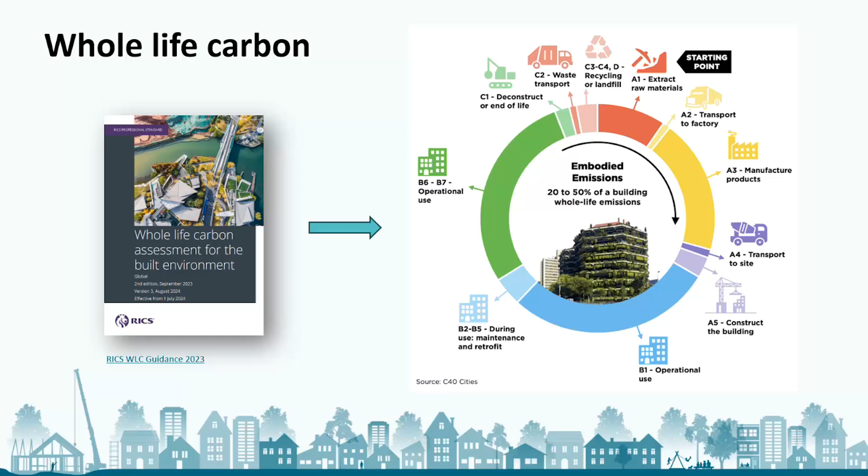Next slide, please. I think one of the problems in this world is the terminology. Sadly, it's full of jargon. And even the professionals like myself and Mansi get caught up in it sometimes. But this is, I think, a handy little guide. This incorporates some of those ABC modules that you saw on the previous slide, but kind of defines the terminology a little bit.

And you'll loosely hear people refer to upfront carbon, embodied carbon, life cycle assessment, whole life carbon. And sometimes they're used interchangeably and refer to the same thing, but this is a handy little diagram that spells out exactly what terminology is referred to what modules, and this again is found within that RICS guidance that we spoke about. So hopefully a useful aide-memoire to get you up to speed with the lingo.

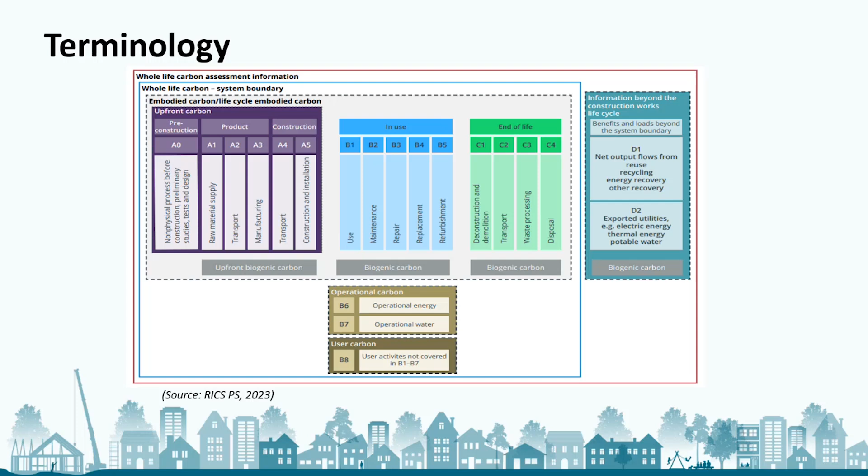Next slide, please. So moving on to operational carbon and the following slide. One of the questions that I'm going to attempt to answer over the next 20 minutes or so is, how can designers balance the operational carbon with embodied carbon, along with all the other design factors that you need to consider when designing housing? So the following 10 slides are my top 10 examples of where you can get the biggest bang for your buck, the most positive outcomes from one design solution.

And I would encourage you all, perhaps if you're in local authorities, to hold developers to account to maybe make sure some of these top 10 design interventions are in designs, and ask developers why they're not. And if you're a developer, then maybe you can challenge your architects around some of these design interventions.

I've tried to put a cost-effective stamp on some of these slides where I think, I'm no cost consultant, but I think there's a relatively biggest bang for your buck in terms of the design solution and how much it might cost. Doesn't mean it will cost nothing, but it means relatively little in comparison to the outcome that it achieves.

And then the icons that I'll show on the right as we go through are what the design feature will impact on. So sometimes you can have a positive impact on all four: embodied carbon, operational, daylight, and thermal comfort. Sometimes just a couple. So I've tried to highlight where they make the biggest difference.

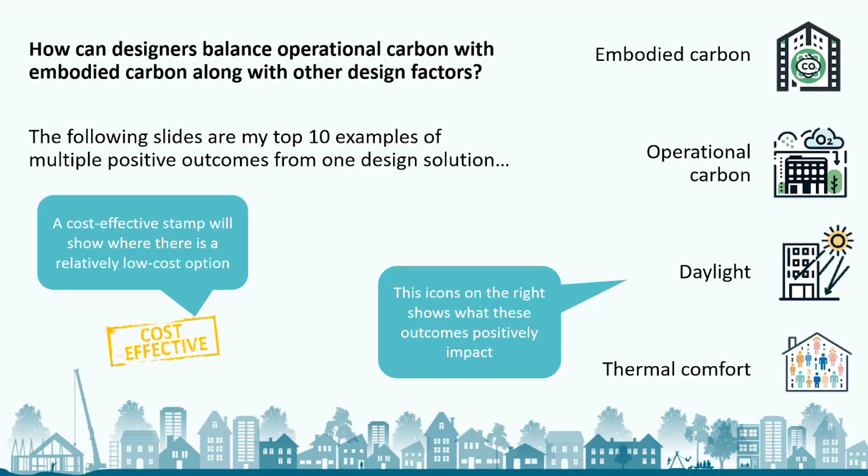But what I should say, I think one of the key things I've learned of late is that good quality homes is the single best thing to aim for. If you can design, build, and have good quality homes in your local authority, they will be loved, they will last for longer, and therefore they have a much greater sustainable outcome. So that kind of takes precedence. I think that's the easy nugget to take away. So next slide, please. Let's dive into the top 10.

So in not necessarily any particular order, number one is airtightness, but with mechanical ventilation with heat recovery. And forgive the image, but if you can encourage developers to make the homes airtight, but introduce MVHR, the two need to work hand in hand. And I think they're relatively cost effective. An MVHR unit and its constituent parts will be £3,000 to £4,000 per home. So relatively low cost, but huge output in terms of operational carbon, it makes a big difference to seal up the homes and reduce your operational energy and carbon.

And it does have an impact on thermal comfort as well, because you get less draftiness through the homes, and probably a fifth impact is well-being. You get much more health conscious homes, if you like, if it's designed well.

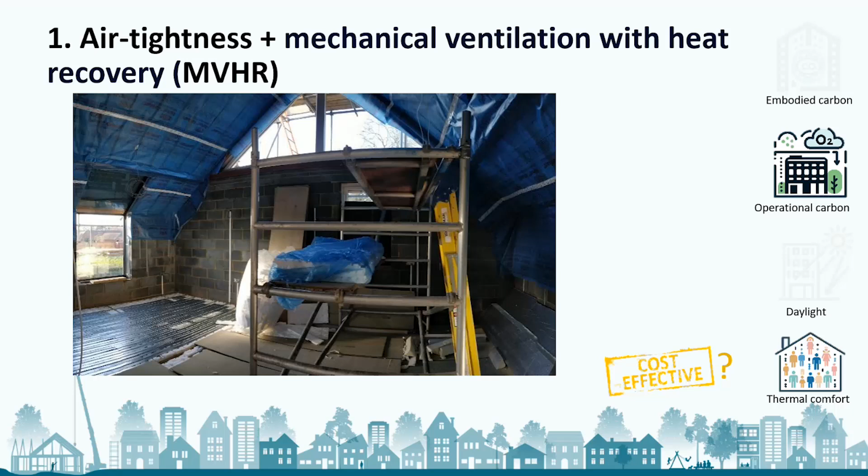Next slide, please. So this is a particular bugbear of mine, and something that's really easy to get right, and something that is cheaper and will impact all four. This probably should be top of the pops. This one is not have floor to ceiling windows. It's a really simple design intervention, putting an upstand into the glazing. Glass has a high embodied carbon content, and wall does not. So less glass, more wall equals good.

Operationally, on the whole, it has a benefit, because glass leaks heat a little bit more than walls do, and homes do tend to be in heat demand for most of the year. There is a slight nuance to this, where on the south facing facades it is sometimes beneficial to have more glass, and you make the most of the winter heat gain. But on the whole, upstands and not having floor to ceiling windows is a good thing.

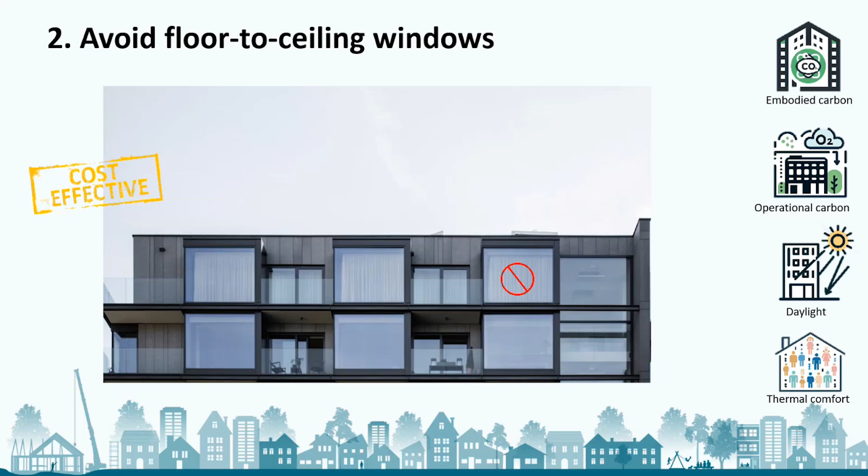Daylight wise, you don't get huge amounts of impact having glass below, say, 800 millimeters. Daylight is not compromised. And from a thermal comfort perspective, you get a lot of cold downdrafts off of big glazed panels, particularly in the winter. So they cause a little thermal comfort asymmetry, and they're not so effective. So hold your architects and developers to account. Don't have full height glazing. Next slide, please.

So insulation specification is another relatively cost-effective impact you can have. If you move towards raw materials, in particular sheep's wool and the like, it can have relatively significant embodied carbon impacts, in terms of good impacts. And for sure, if it's specified right, you can have very big operational carbon impacts.

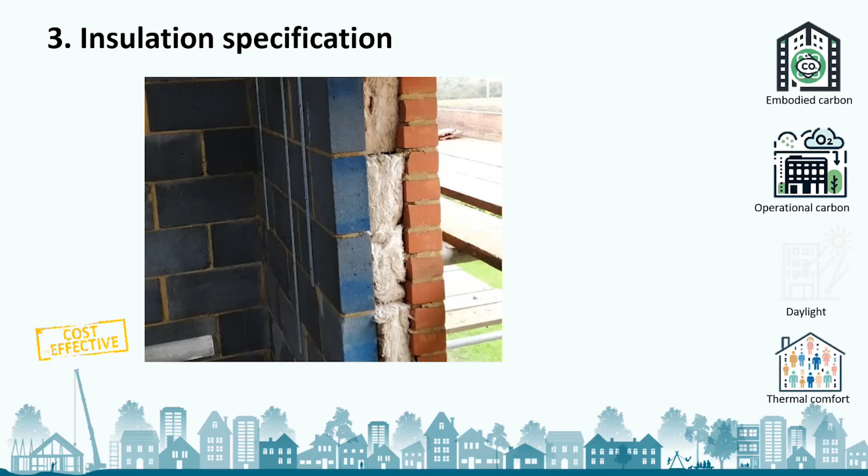The thickness of the insulation also can make a huge difference to operational carbon. Obviously, it doesn't impact daylight so much, but thermal comfort will have a slight benefit for trying to minimize any condensation issues, any cold downdrafts. But the top two tend to be the most impacted ones there. Next slide, please.

So thermal bridging is a tricky one. It's a detail. Devil's in the detail. It's certainly cost effective. It needs to be done right. It's a RIBA stage 4 kind of level of detail that designers need to be considering. And I suppose, to summarize, it's trying to make that yellow bit in the wall, the insulation in the wall, consistent all the way around the building.

And if you imagine it like a big coat wrapping you up in the winter, to keep that consistent layer, and not having any breakages in that layer, like, say, balconies penetrating through it, and even where you have junctions between your wall and the floor, trying to keep that insulation layer consistent.

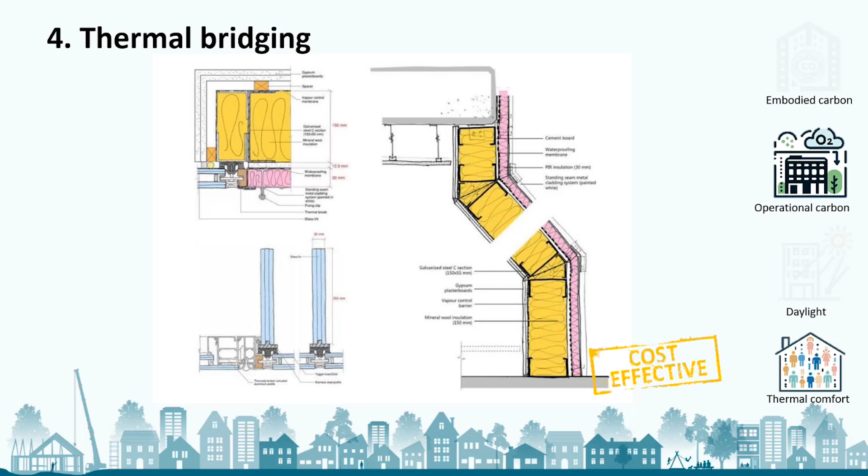It's not so impactful on embodied carbon, and certainly not impactful on daylight, but it will have a huge operational carbon benefit. And again, it will have a thermal comfort benefit, given that you won't have any condensation issues. You'll have less thermal downdrafts and lower thermal asymmetries across the home. So definitely one to question your developers and architects on. Next slide, please.

So where glazing is located and how big that glazing is, this talks to design number 2, that glazing floor to ceiling one, but it's very similar. This is a very cost-effective one. It's something that architects can look at in the early design stages, sort of looking at the window to wall ratios here. And if you have good architects, good consultants, they can do a bit of a parametric type analysis early on to work out where you put your glazing and how big it needs to be.

And there are some nice passive house principles here, where, simply put, if you can encourage more glazing to the south facade, you get more of that beneficial winter solar gain. You obviously need to protect in the summer when it gets a bit too hot with shading. But the principles of more to the south and less to the north are good principles to follow.

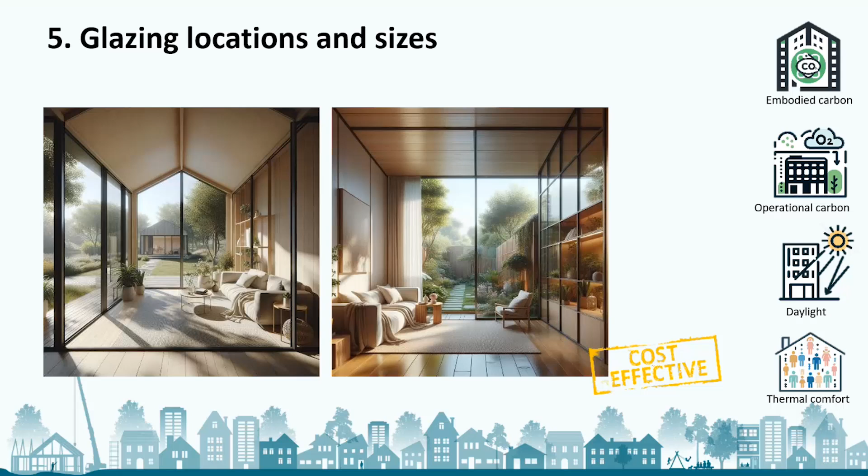Not always practical, I appreciate, on a site when there's maybe other considerations to take into account, but generally speaking, if done right, you can have embodied carbon benefits, operational carbon benefits. It can maximize your daylight and optimize your thermal comfort as well. So good design solution there. Next slide, please.

So net zero carbon definitely is moving away from gas and more towards electric sources of heat. So going fossil fuel free is a big tick in the box. I'm not sure it's cost effective, so the stamp doesn't apply here, but big wins. Maybe one day it will become cost effective, but big wins in terms of embodied carbon and operational carbon for sure.

And strictly it's not a net zero carbon building if you're still on gas or using fossil fuel in any way, shape or form. So a move towards electric heat and electric houses is definitely a good place to go. Next slide, please.

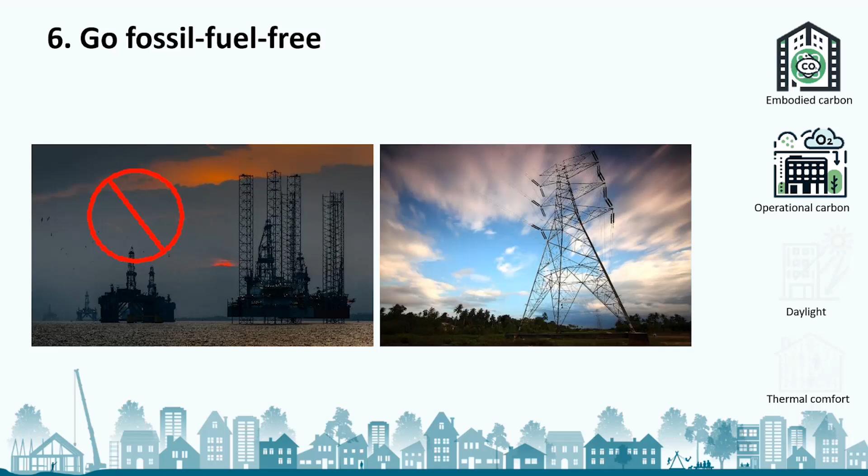Number 7, external shutters. I'm sure many of you have been on the continent on your travels around Europe; you'll probably see these are prevalent there. And as the UK is moving into a warmer climate as a result of climate change, we are seeing warmer summers, and external shutters are a really beneficial design feature generally, and they offer a lot of quality to

a home. They do compromise a little bit on embodied carbon, but if they're done with natural materials like timber, especially for lower-rise housing, it's minimal impact on embodied carbon, and it ticks the quality box that I spoke about earlier. And they give you operational carbon benefits, because it means you can have the right amount of glazing in the right places to get the most from the winter sun, but then close those shutters to protect you from the summer sun.

They do help with daylight, because again, you don't need to worry too much about overheating, and can optimize the glazed ratio for daylight and make your windows a little bit bigger. And then you have a benefit to thermal comfort, because you can get some thermal benefits from those shutters as well, and protection from winds, potentially in the winter time.

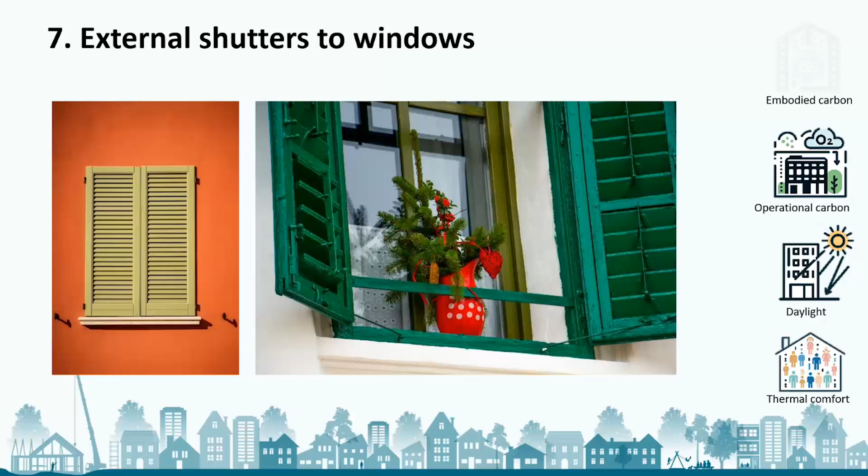So there is and should be a big move towards centralized energy and district heat networks. What this essentially means is taking away the house-by-house approach to heat and moving it into one energy center. That energy center would supply the heat in a relatively low carbon or zero carbon way, and distribute it through heat networks to homes. There's embodied carbon benefits here, because having one plant is better than having loads of little plant across multiple houses. I think it can and should be cost effective for that same reason. You've got one bit of kit instead of multiple bits of kit.

But I guess you've got the infrastructure to deal with as well. Operationally, there should be some carbon savings as well, mainly because you get efficiencies of scale. Having bigger heat sources in your energy center will give you economies of scale and efficiency savings. But also, if you're in an area where you might have different end uses like an office, or even data centers, which we're seeing a lot more of in cities and urban areas giving out heat, and if they can share that heat with homes, then you get huge savings there too. So networking that heat through these energy centers is a real benefit.

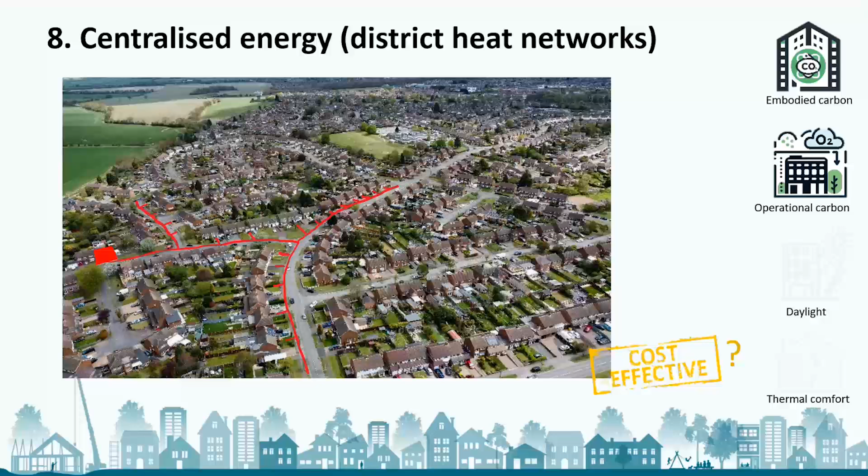So form and massing is very much an early design stage thing. It's something that architects and consultants like myself would help with. It can be really cost effective if done right, and there are some Passive House type tools that can help with this. This is about orientation, the proportions of your building, and where you position it relative to the sun that each building is exposed to. It can have benefits to embodied carbon and operational carbon, and you can get the most out of the daylight and exposure, as well as maximize thermal comfort.

It's a multi-factor thing to consider, and can often be a little bit impractical because you have other challenges that perhaps take a higher priority at the early design stage, such as your road layouts, how the master plan's arranged, safety, public realm usage, and also viewing lines and aesthetics may come into play. So there are many factors, so it can be a little bit tricky, but there are some simple principles that architects can use and be aware of.

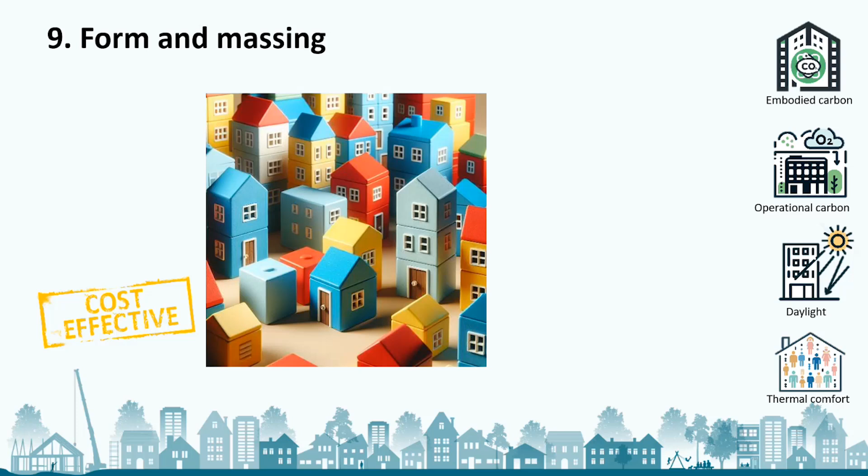Next slide, please. And last but not least, lighting is a really easy win. Certainly cost effective. All developments should be moving towards LED lighting. It's a really easy win. It helps massively with operational carbon. I'm not too sure the embodied carbon savings are significant, but operational carbon savings certainly are.

I've put the thermal comfort checkbox here as well, because some high wattage lighting solutions do kick out heat, and in the summer that's the last thing you want, particularly in evenings when you're turning your lights on and it's still 25 plus degrees outside. So certainly moving towards LED is a really easy win, and everyone should be doing it.

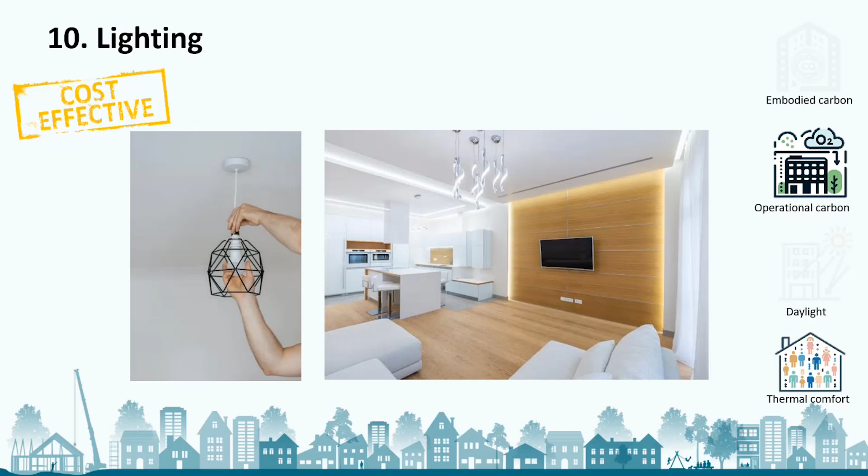Next slide, please. So not only are those 10 design solutions good things to look out for, and I'd encourage you to maybe have a little checkbox for those 10, but there's also these processes to consider during housing design. In-use monitoring can definitely be a useful mechanism and process where developers perhaps report back to the councils, and local authorities can hold developers accountable by having an in-use feedback.

Maybe tricky in terms of data, GDPR, I can never remember the acronym, but data sensitivities about giving up data. But there's certainly methods to help occupants reduce their consumption by having appropriate metering in place, so that occupants can see what's consuming the most electricity, and how they might be able to control their environments and their energy consuming devices a little better. I think there's also a big thing around occupant education and how and when to control various relatively new technologies like heat pumps and mechanical ventilation. So upskilling and educating occupants is important.

And then training for planners and people like yourselves, I suppose, to help encourage good design within developments through the 10 points that I've shared earlier, and through CPD seminars and sessions like this. I think they're really valuable things to help share knowledge and help encourage good design.

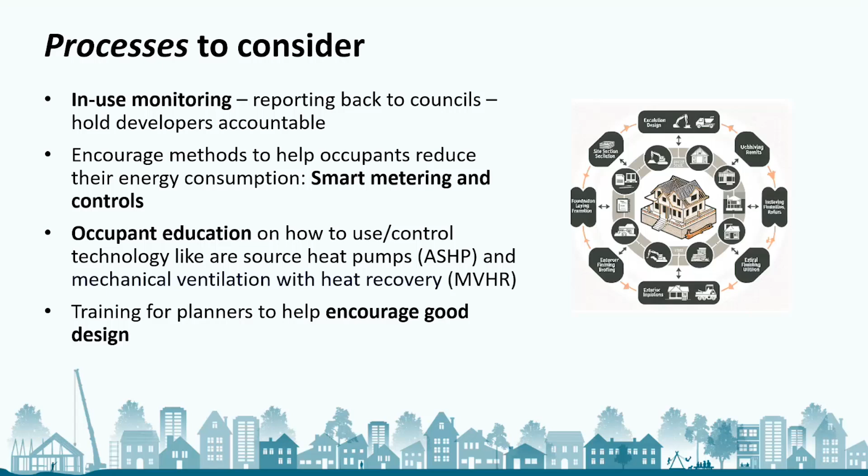Next slide, please. And then finally, delivering and achieving net zero carbon homes, I fully appreciate it doesn't come without its challenges, but there are certainly some opportunities around it. So on the challenge front, certainly cost is often picked up as a key thing, but I think some of those design solutions I've presented earlier can address that. There has in the past been a problem around how we define net zero carbon, and hopefully the new building standard addresses that and gives us all something to point to and say, right, that is good practice and that is progressive and acceptable net zero carbon design.

Knowledge and skills is without a doubt a real challenge in our industry. It's full of jargon. Even myself, and probably no doubt Mancy's learning every single day, and there's loads for lots of people to learn. So sharing knowledge and skills is a huge part of it. And things have changed a lot over the last few years in the sustainability world. It's been a bit of a whirlwind, certainly in the last 3 to 5 years. There is a bit of a challenge around precedent for net zero carbon homes. There's perhaps not many out there, and Mancy will show you some of the case studies later that will hopefully give some inspiration and references for you to point to.

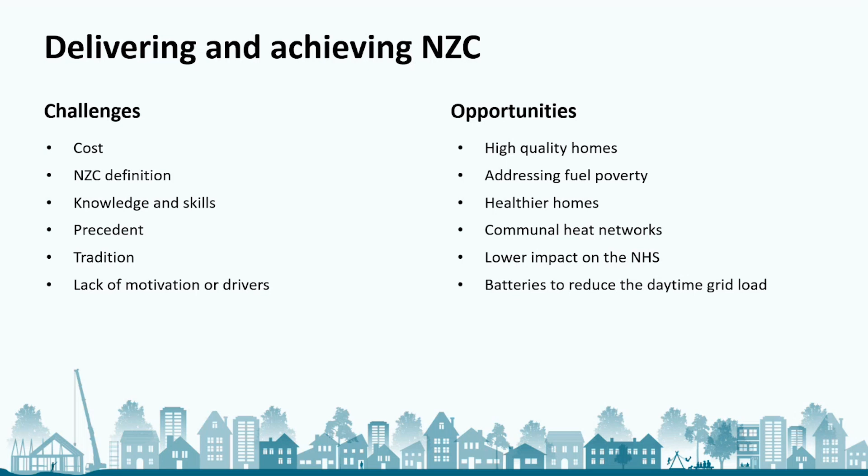I'm Mansi Desai and I'm a technical director and head of sustainability at Pell Frischmann. We are a sustainable design and engineering consultancy. I've been working within sustainability for over 20 years now, delivering low carbon climate resilient schemes for various sectors, including buildings, land development, transport, energy, and water. My team works alongside our multidisciplinary environmental and engineering teams to offer pragmatic designs and advice both to the public and private sectors. And we've been doing a lot of work with Homes England as well.

So picking up from what Ben's shared earlier, when we think of net zero homes, we often focus on energy efficiency. We've spoken a bit about solar panels or insulation, smart appliances. But there's another important factor we can't overlook, which is embodied carbon. Now, embodied carbon is the amount of greenhouse gases which are associated with the construction and life cycle of a building or infrastructure. So while operational carbon, which is heating, electricity, etc., is often addressed in net zero designs, embodied carbon focuses on the hidden emissions within the building's life cycle.

So in the next few slides, I'm going to take you through some of the key considerations to make, what it all actually means, and also share some project examples. Next slide, please. So embodied carbon accounts for a large proportion of emissions in energy efficient homes where operational energy can be minimal. So you may think that your design or development proposal includes solar panels or double glazing or low energy electric supply or all of the wonderful considerations that Ben was talking about earlier, but your overall carbon impact could still be high because of your embodied carbon.

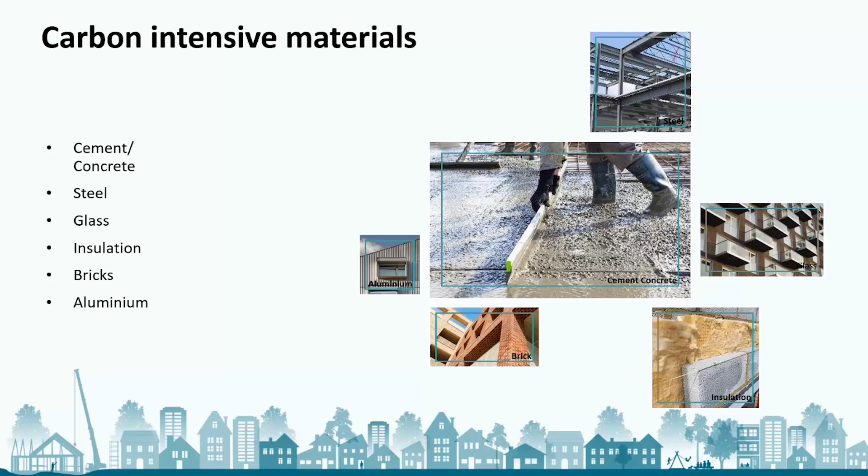Next slide, please. So what accounts for embodied carbon of these materials? Each of the materials that we looked at in the previous slide and any of the other materials that we've spoken about today, or you might know of, which are used within housing developments, all of them go through this process, which includes extraction of virgin materials such as aggregate, metal ores, etc., if they are not from a recycled process, that is. Secondly, manufacturing and the refining of those materials. The transportation of the materials to the construction site, so the greenhouse gas emissions from the vehicles for transportation. The construction and installation, which may require specialized equipment, electricity, water, labor, etc.

And it doesn't stop there. It also includes the disposal of materials. Most of the sites would have some form of existing asset. And so the demolition or dismantling of the existing asset and disposal of those includes a lot of carbon. And once operational and in use, the maintenance, the repair and repurposing of an asset also has embodied carbon. So as you can see from the infographic below, every stage of the life cycle includes embodied carbon, right from extraction to landfill and recycling.

Now, if you look at the use and maintenance of the building, that's where the majority of your operational carbon sits. And this relates to the figure that Ben had shown earlier. So embodied carbon truly is within every stage, and it's a very important point to address when you're wanting to develop a net zero home.

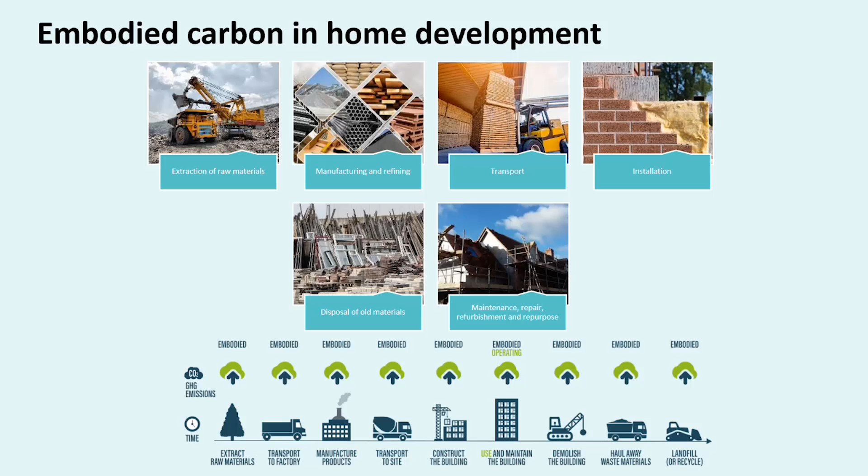Next slide, please. So developing a net zero carbon asset requires driving down the embodied carbon to an absolute minimum. So early involvement is key. The earlier the involvement in the design process, the bigger the potential carbon saving and embedding of sustainable design practices. So as companies are committed to net zero pathways of their own, as governments are committed to net zero pathways, they are now also focusing on reducing the carbon footprint of what they're building. So less embodied carbon can mean a lower requirement for carbon sequestration. This is a vital step in reaching global emission reduction targets.

Whole life carbon approaches ensure that all of the factors that contribute towards the creation, maintenance, and operation of a home, which ranges from material choices, construction methodologies, maintenance, operational energy, water usage, and also planning for cost and funding, are taken into account.

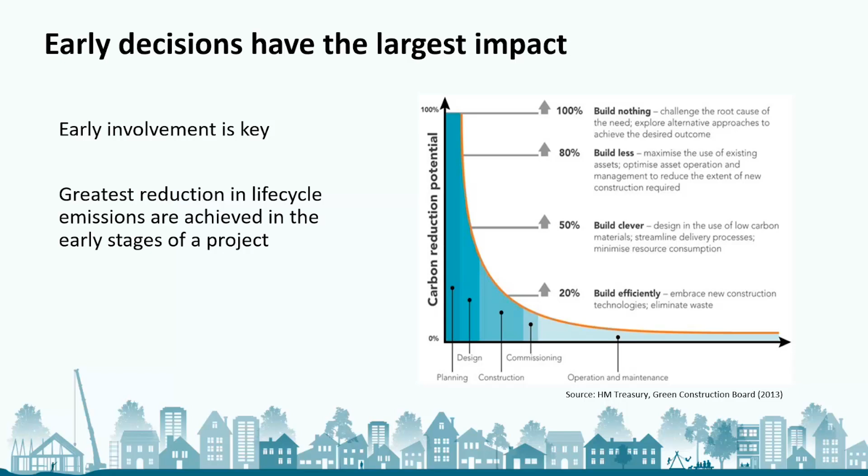Next slide, please. So when it comes to building homes, infrastructure, commercial spaces, the decisions made during the initial design phase have a lasting impact on the structure's carbon footprint. We've seen this on every project that we are involved in. The earlier you get involved, the earlier you start deciding what sort of sustainable practices you want to adopt, the greater the impact from not just a carbon perspective, but also from a cost perspective.

It's easy to think that reducing carbon emissions is something that can be addressed later, perhaps through energy efficient technologies or renewable energy sources. However, by incorporating carbon right from the start, we can make a far more lasting difference. So how do you do this? Number one is setting clear net zero goals right from the start. And whilst doing so, ensuring that the targets are aligned to building standards.

We heard a bit about the building standards, and also local, regional, and national net zero targets and policies and standards. Every local authority has some level of net zero targets. Every organization also has their net zero targets. So making sure that all of those are taken into account. It's not just at an operational level for an organization, but you drive down your targets to an actual project level.

The initial design stages is where the foundational choices can be made, especially with regards to what materials are being used, how the building is designed, how is it going to be constructed, how will it interact with the environment. These are all questions that you should be asking right at the start. For example, choosing prefabricated and modular techniques can help lower the embodied carbon, and also addresses the changing landscape of the industry. We are seeing a shift from building assets that are built for a 50-year lifespan. You need designs that are adaptable.

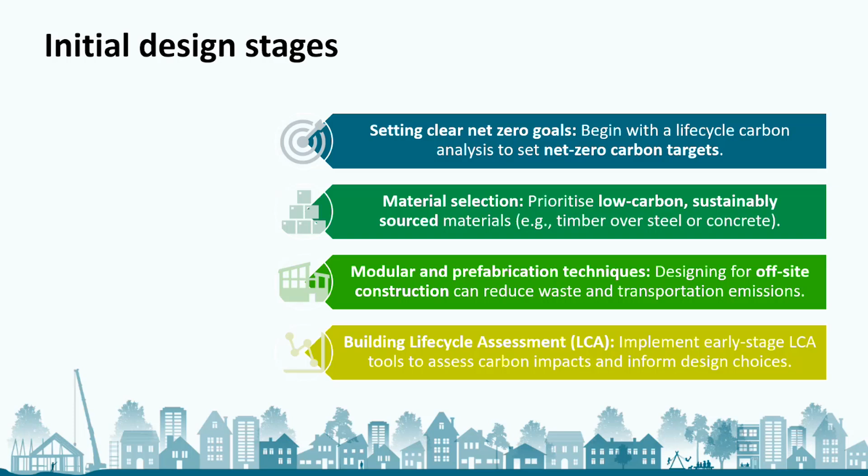And finally, implementing life cycle assessment also allows for the integration of renewable energy systems in ways that can make more sense for the building's specific needs and location. So this proactive approach will allow the designers to create energy systems that are highly efficient, cost effective, and further reducing our reliance on fossil fuels.

Next slide, please. So just taking a sidestep, it's also important to consider low carbon design, but what does this mean from a planning context? I'm not going to go into too many details of what exactly the planning regulations say for each type of assessment, but it does involve integrating sustainability and carbon reduction strategies at the earliest stages of your design, planning, and construction process. Now, as per the planning guidelines, there are specific planning validation checklists, which include sustainability and energy statements, including carbon assessment, incorporating designs like SUDS, sustainable transport planning.

If you are within any of the London local authorities and borough councils, then you've also got the circular economy statements that need to be prepared. All of that includes carbon assessments. There is a greater emphasis now on achieving low carbon, energy efficient, and sustainable design, often which promotes the integration of renewable or green technologies. More and more local authorities, and we're seeing this, are looking at schemes that can demonstrate a sustainable design measure, which considers environmental, economic, and social pillars of sustainability.

For example, delivering biodiversity net gain, which is a mandatory 10% on new developments, which is now a legislative requirement. It can also improve the amount and quality of biodiversity on site. But what does that mean from a carbon perspective? Planting trees, shrubs, etc. helps with carbon sequestration. So that helps bring down the overall carbon, along with supporting sustainable drainage features, and helping attenuation in flood risks, etc.

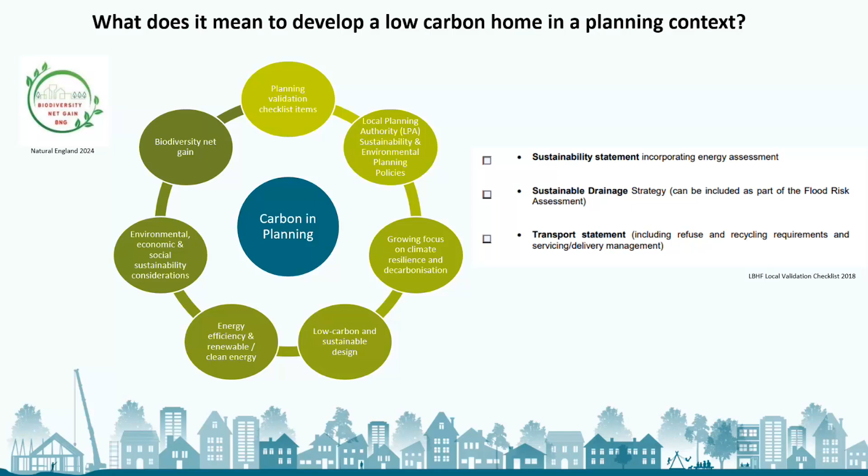Next slide, please. So incorporating carbon within your planning consideration does not require a major shift really from your current practices. Whilst you engage with your local authorities on environmental impacts or design features, you can also work with planning bodies to align the net zero goals and highlighting the sustainable benefits.

Presenting findings on how projects can minimize the embodied carbon impact through environmental impact assessment, which is EIAs, and it already looks at climate change resilience and vulnerability, materials and waste as key EIA considerations. And this is also an opportunity to invest and showcase low carbon material benefits. So by providing evidence to the authorities on how sustainable material choices can reduce carbon impact.

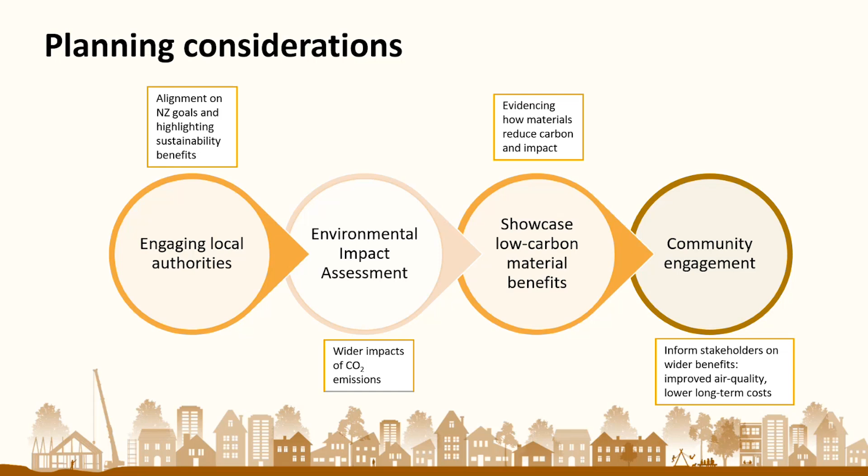I understand there is a cost implication to that, but if we are to reach our net zero targets as a sector and as a country, then we need to start making these kind of choices right from now. And of course, through community engagement, informing your stakeholders on the wider benefits, such as improving air quality or biodiversity, human health, and lower long-term costs as well.

Next slide, please. So I'm just going to take you through a couple of project examples where we've looked at embodied carbon, but also from a wider planning perspective. Next slide, please. So the first case study is the O2 Finchley Road scheme.

We were commissioned by Landsec to prepare a residential-led hybrid planning application for the redevelopment of their O2 Finchley Road retail site. Now, the site is 5.6 hectares and bound to the north and south by Network Rail and Metropolitan and Jubilee lines, respectively. The emerging master plan seeks to create a locally integrated and a highly sustainable new community in the London borough of Camden.

So the scheme's emphasis was on developing high-quality green infrastructure. The plan included providing approximately 1,900 homes set within modern, low-carbon, energy-efficient apartment blocks. Now, Landsec also have a net zero carbon by 2030 target, which the O2 scheme had to contribute towards. So we worked with Landsec and ensured that their sustainability targets as well as planning policies are taken care of and are included within the design.

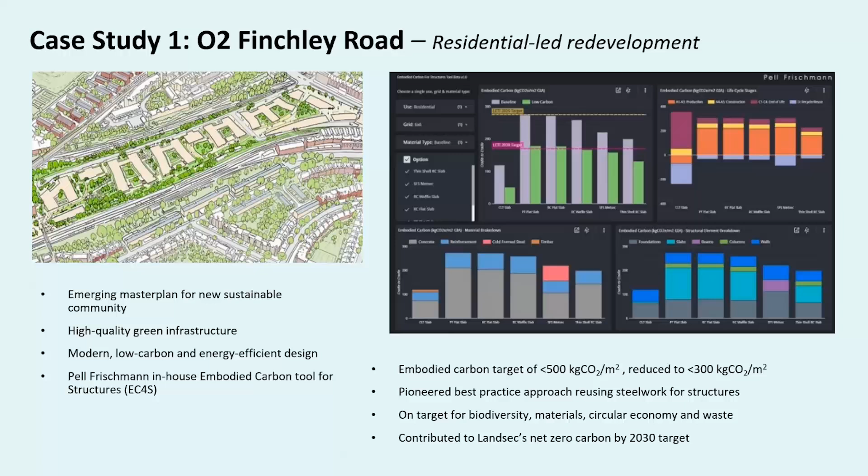Next slide, please. The next example is of a residential-led mixed-use development scheme in North Ashchurch. So in 2019, the Tewkesbury Garden Town achieved Garden Town status, and the focus was to create new communities in a complete and well-rounded manner. So this involved excellent housing options, providing job opportunities, and establishing important connections to essential community amenities. So North Ashchurch is set to play a crucial role in establishing the benchmark for the Tewkesbury Garden Town communities.

These will form, if my memory serves me right, around 4,000 new homes where people can live, work, raise families. So there are schools, there are workspaces that are being developed, local parks, etc. The community will also be well connected through pedestrian and cycle-friendly routes as part of a sustainable transport network. So the proposed focus was on three main themes: creating green spaces and nature, movement and placemaking.

So the new housing delivery as part of this scheme will likely be subject to the government's new Future Homes Standard. Currently, the project inputs from our side involve inputs into the environmental statement and the planning application. So as part of this, we are providing support on energy and climate resilience work, which covers assessment of whole life carbon, so both embodied and operational, as well as topics of material and waste, looking at key considerations to understand the impact on climate change.

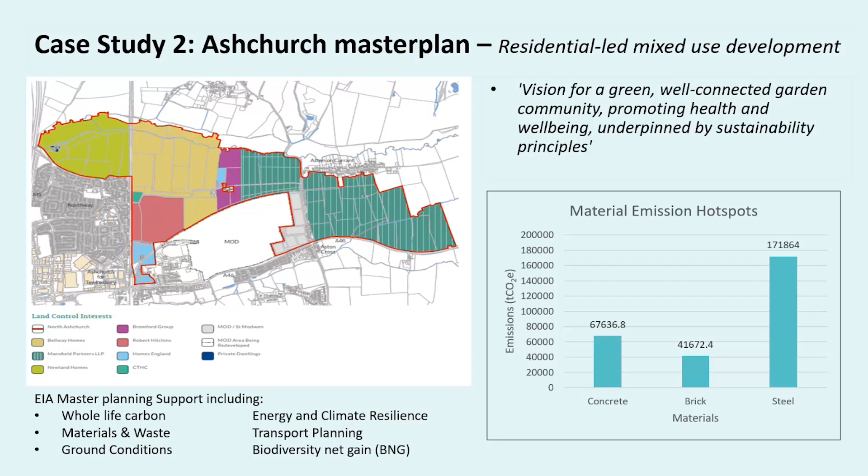We are also doing geo-environmental assessments to make sure that any material that is being excavated is actually good to be reused on site. And we're also doing land assessments and transport planning. So this is really a well-rounded scheme where we're not just looking at material carbon, but carbon within every element of the design. Next slide, please.

And finally, this is a commercial scheme, Space House, which was originally designed by architects Richard Seifert and Partners and structural engineers C.J. Pells and Partners, now Pell Frischmann, between 1964 and 1968. The building received Grade 2 status in 2015. The scheme includes two blocks: Tower Block, which is 15 stories, and Kingsway Block, which is 7 stories, with link bridges between the two blocks and a 2-story basement.

So Pell Frischmann, along with GT, BAM, Atelier 10, and Squire and Partners, were key in delivering the RIBA design stages 4 and 5 of the scheme. The scope included revitalizing Space House, bringing it up to the standards of a modern workspace. It also included transformation of the public realm and turning the basement from an underused car park into an event space and cycle parking.

The structure required to achieve net zero, and so we used the reuse and redevelopment principles to achieve the targets. This was another scheme where we used our in-house EC4S carbon tool, adopting the use less approach to minimize any additional carbon. So what did we do? Spare structural capacity was identified and utilized, helping develop a low carbon and lightweight structure.

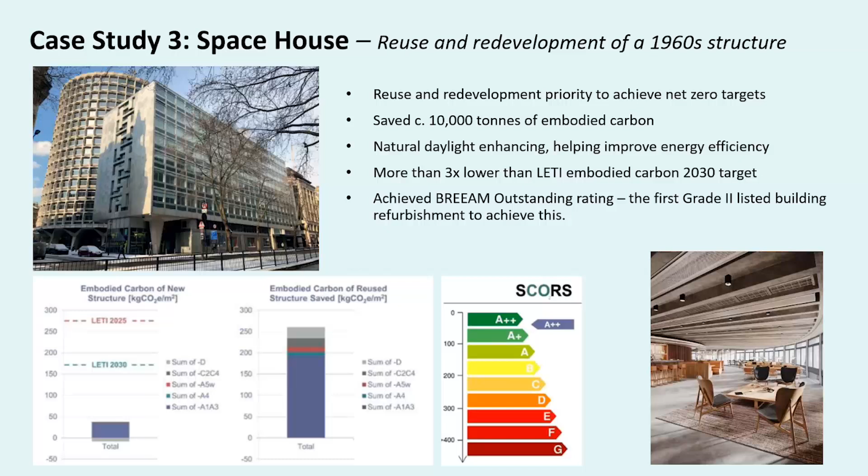And the scheme also achieved a BREEAM outstanding rating and was the first Grade 2 listed building refurbishment to achieve this. Now, Space House was also shortlisted this year for the IStructE award, and the building has recently been opened to the public. Next slide, please.

So when considering carbon or sustainable housing development, it's not just about materials and energy, but as I've tried to show from some of the case studies, there are wider considerations that should be taken to achieve net zero development as well. This includes biodiversity, which not just helps with enhancing the natural and the built environment, providing health and wellness, but also acts as carbon sinks, whilst having a positive overall impact as well. Sustainable drainage helps with tackling climate change and developing a future-ready development.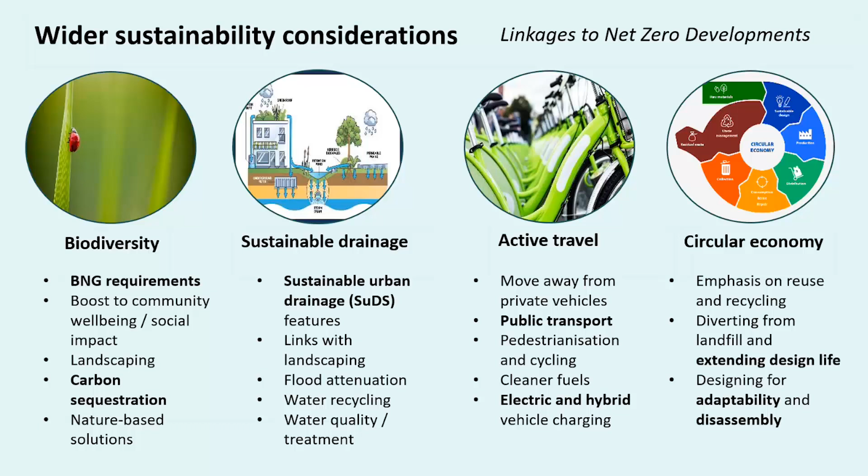A great way to reduce carbon is the inclusion of active travel considerations. A modal shift to active travel and public transport helps to reduce the need for other road network improvements to increase road capacity. And adopting principles of circular economy to reduce our reliance on new materials, thereby diverting materials from going into landfills, which are already at maximum capacity. And so we're reducing embodied carbon through that as well. So this is not an exhaustive list, but these are definitely some of the considerations that you need to be taking, or you can achieve rather, if you look at overall net zero carbon.

Next slide, please. So there are several design principles and considerations that feed into a net zero home, as well as increasing sustainability across the whole development. Some key examples include following the carbon reduction and the waste reduction hierarchy, designing for longevity, adaptability, and disassembly, and promoting the reuse and recycling of materials as well. So making low carbon material choices, for example, instead of using conventional concrete, investing in earth-friendly concrete.

Appreciate that this could come at a price, but there are wider long-term benefits. So there could be some upfront cost of using a new material or a new technology, but it will have wider carbon and overall environmental benefits as well. Now, EFCs have the potential to reduce carbon footprint by 70%. They are durable and can be used in ready mix and precast concretes.

Another example is ashcrete, a concrete alternative that uses fly ash. And I think this can reduce about 25% of cement in concrete, thereby reducing the overall carbon emissions as well. There are also some places where hempcrete bricks, which are made from hemp, lime, and water, are used. Other examples include using timber as a material option, or straw bales as insulation.

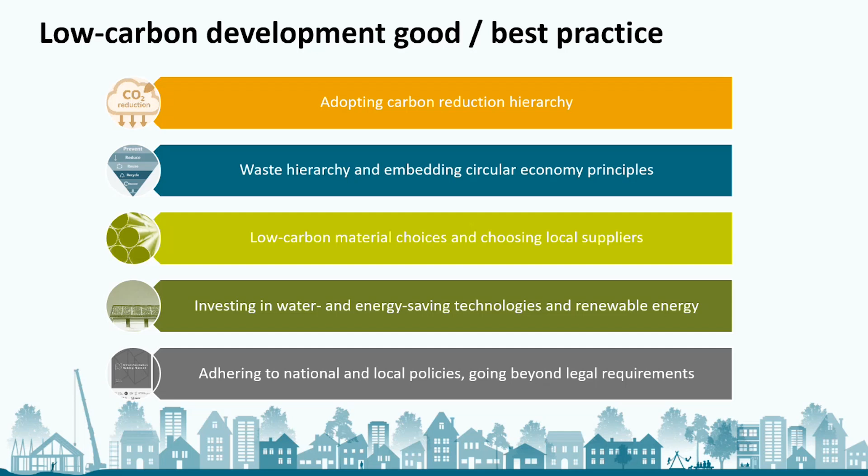And next slide, please. So to end, I just want to leave you with this slide. Currently, there are various barriers around high upfront cost, I've spoken about some of that, and limited availability of low carbon material. But with increased demand, the supply will increase, and thereby the costs will come down, and the acceptance of these materials will increase as well. Someone's got to start first, right? There is need for investment into future solutions and support from the governments on standardizing policies, which hopefully will be driven by the new building standards.

Retrofitting a house instead of building a new one can save about 68% of embodied carbon. According to the World Economic Forum, addressing embodied carbon in housing is a scalable solution and could cut about 4.6 billion tons of carbon emissions, while improving the state of housing globally. So there's a huge financial drive as well as reducing your overall carbon. Homes England, we know, is already leading the industry with what they call demonstrator projects, which are like pilot schemes, where they look at cost-effective, scalable net zero solutions.

For local councils and developers, and I know there's quite a few of those on the call today, this is also an opportunity to lead by example. Most of you are carbon committed or will have your own internal targets. So your efforts can be a catalyst for an industry-wide change. And for the likes of Homes England, the next steps for implementation could come from stronger commitments to applying these practices into all of your projects. For example, making a targeted requirement for tender documents to drive change.